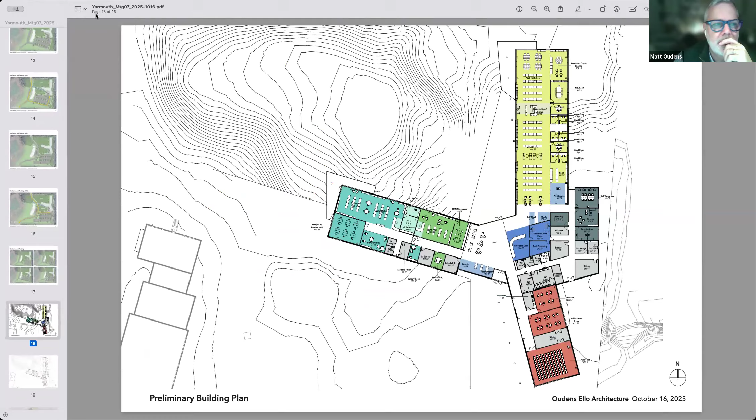Alright, we met at the Board of Selectmen, or the Select Board, we were making a presentation of our progress so far and presented them with the challenges of the MacArthur School, gave them the results of the visit from your engineer and the initial concept design for the site. And then we got our marching orders to pursue this with an aim of meeting the December deadline for submission for the grant, and keeping alive on the side the possibility of refurbishing, renovating, repurposing the MacArthur School. So for this part of our conversation, looks like Matt has definitely moved ahead with the concept design.

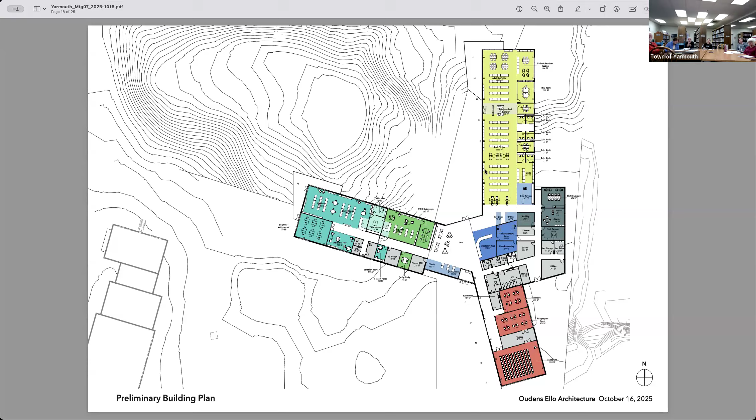So as you can see, this is a more concrete plan. It's now delineated with walls and doors and solid versus glazed partitions, furniture, so you start to get a sense of scale and can understand the layout. In the adult space, for instance, although we have not done a collection count yet, the shelving here is kind of a placeholder graphically until we do a collection analysis. But you can see where we've got book shelving, where we have groups of furniture.

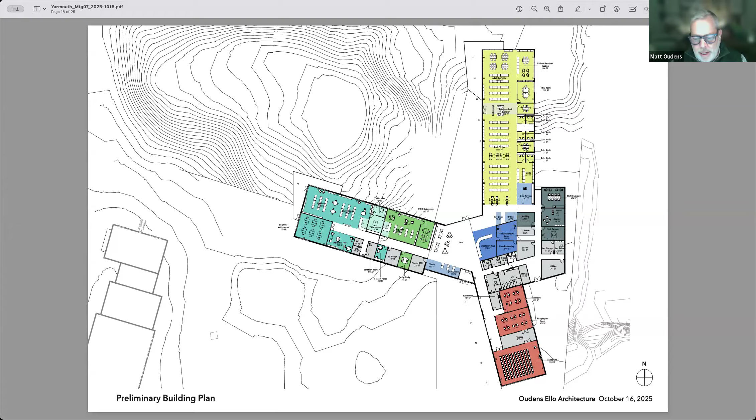These are individual lounge chairs. There's a reference desk in the middle here. Study rooms are located along the right side of the plan. The community room has seats now in at the front of the room, on the right-hand side here. So generally speaking, you can get a sense—I'll turn the color off here to make it a little bit easier to read.

So this is a first pass. There will be many, many iterations and revisions to this, but this was our first attempt to get this down on paper—double-check square footages of things. We've got some work still to do to tighten this up and make sure each room is meeting what the program calls for in terms of square footage, as well as getting adjacencies and access to work properly.

So I'll let Marika and Libby jump in here if there are specific things they want to point out, since they were really the ones developing these plans. Not to put you on the spot, Marika, but if there's anything in particular you've found as you've been laying these out—questions, concerns, or observations you've noted over the last week.

I don't know that there's anything I'd specifically call questions or concerns, but I guess we should point out that the community wing has changed to a certain degree, with the circulation now on the outside wall and the rooms facing the woods to the east side. And we have adjusted the children's and teens wing to show the glass wall that separates teens from the hall.

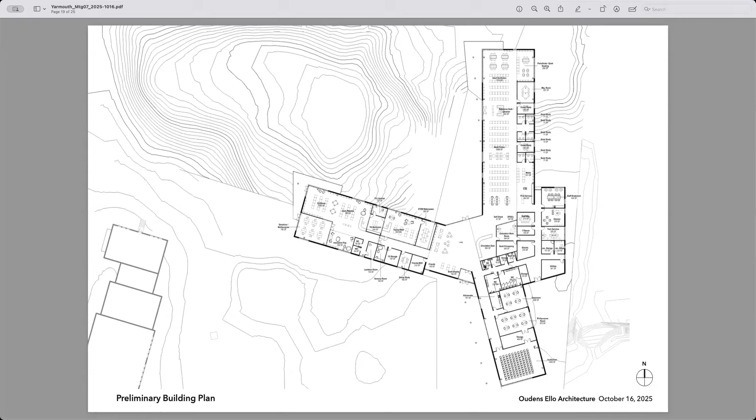This line here represents off hours secure closure. We're thinking that there would be a storage compartment here, and a stainless steel curtain effectively gets drawn across this area with a track at the ceiling. That secures this entire adult wing and the circ desk and staff areas. You would lock this door here, so there'd be no access back into the staff areas.

But obviously we need to maintain access to the bathroom. So we have two multi-stall bathrooms, men's and women's. Those are going to have to be designated single sex, multi-stall bathrooms. But then opposite those, off of that same corridor, we have two single occupancy, gender neutral restrooms as well. That's all part of the off hours experience.

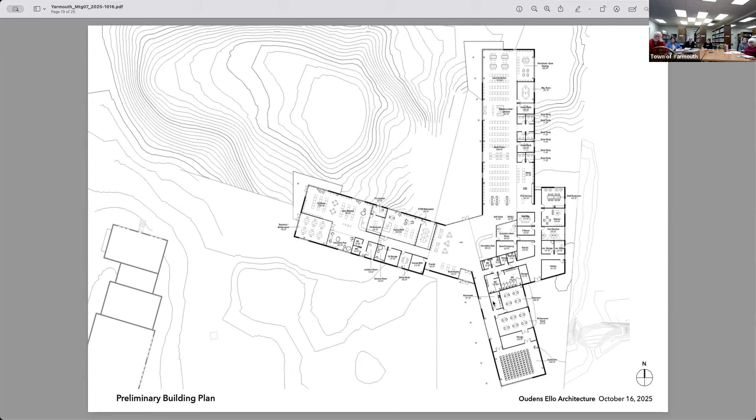The kitchenette here serves both the meeting rooms and activities in the lobby. So even if there's something happening in this meeting room, somebody could potentially get into the kitchen if you're going to have some kind of coffee service. We've also done it in different instances where we have a coffee counter set up that's independent from the kitchen, so the kitchen can be secured and staff only, but there's a public coffee bar or something, if that's something you're interested in doing.

So the kitchen, the bathrooms, storage, which is shared by two of the three meeting rooms, the large one and the classroom, the multi-purpose room, and then the large meeting room - all of that is accessible off hours, as is the lobby. The children's and teen doors would be locked, so basically all the doors in this corridor would be locked. We could actually introduce a door at this end that is open during the day, but you can close it at night to have a single point of security, so you don't have people wandering down a hallway.

So that would mean that the lobby, most of the lobby with access to outdoor space on the north side of the building, this entire community wing, all the public bathrooms would be available off hours. You would use the same door that you would use normally - there isn't a special off hours door.

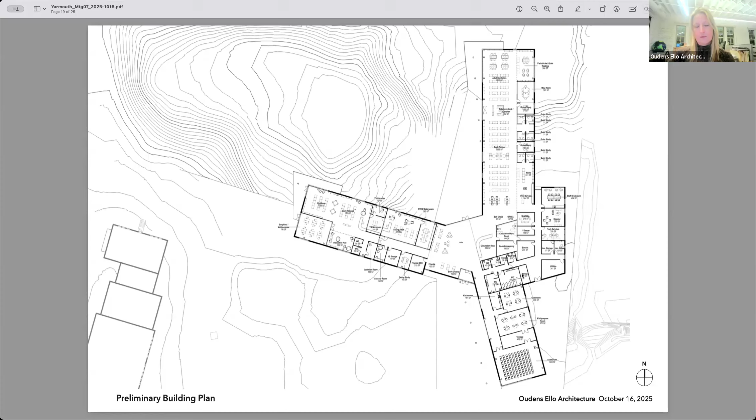Yeah, and that's pretty typical at this stage. When you're first getting things down on paper, they tend to be slightly inflated, and the more iterations we go through, the more we find efficiencies and tighten things up. We might be able to make circulation more efficient in some cases, and get rooms right sized. Right now, my guess is that a number of the rooms are a little bit off - some are probably bigger than they need to be based on what the program calls for. So there will be several rounds of that kind of tightening, along with whatever comments come out of the more specific staff meetings we anticipate having.

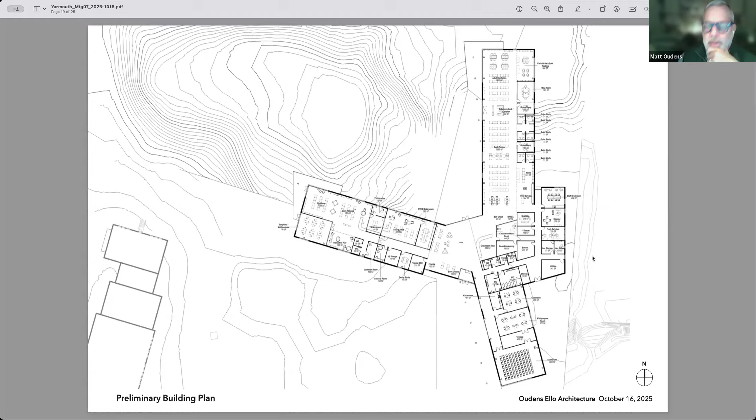I'm going to jump in. Marika, or whoever's controlling the cursor, can you show me where the two circulation areas were? I think I heard there was a circulation area for teens and a different one for children.

Can you see my cursor? I'm circling the teen wing now. This is the staff workroom, between the children's room, which is here, and the teen room, which is here. There's glass on both sides. On the children's room side there's a desk for the children's librarian, and on the teen room side there's a desk. There are doors on both sides of that workroom connecting the desk to the workroom, both from the YA side and the children's side. The main circ desk is here, and the reference desk is here.

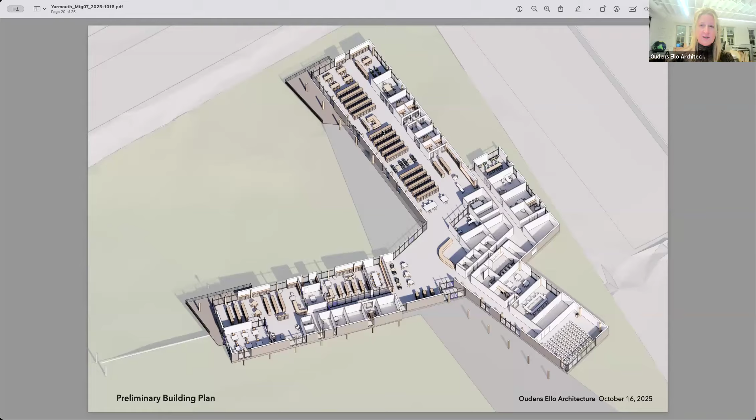Does anybody else have any questions about the plan? Are there only going to be gender neutral bathrooms? Yes, he did describe those.

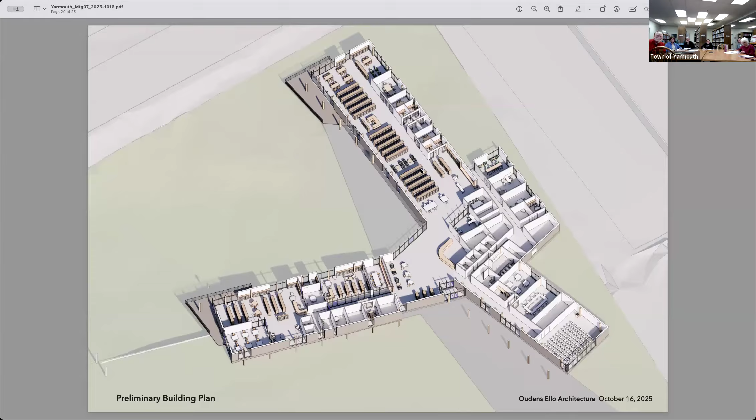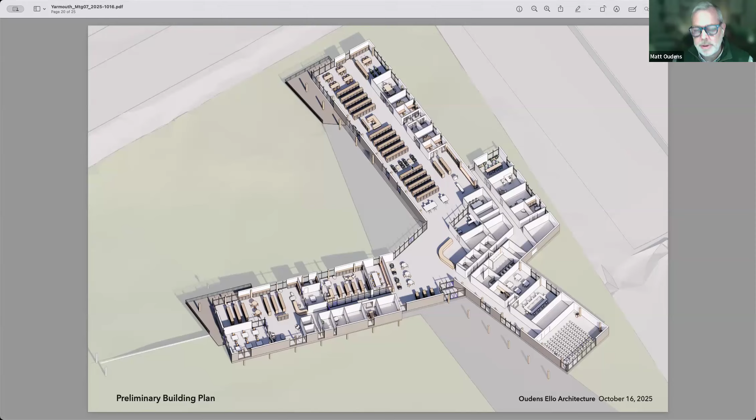Okay Matt, one last thing with this 3D plan up - all of the shelving that's freestanding is meant to be low enough that you can see over the top of it, whereas shelving against walls could be taller. That's our starting point when we do shelving counts and figure out how we shelve the collection. We have actual collection numbers, so we can figure out, for each portion of the collection, how much shelving we need to accommodate it. This is kind of a placeholder now, intuitively striking a balance between collections and furniture, but that will tighten up as we get into that analysis.

All right, so now that Jonathan is here, I'm going to jump back to the beginning and let him take over.

Jonathan, just let me know when you can hear - by the way, can you hear me? I can hear, can you hear me? Okay great, yes, great good. Just let me know when you want me to advance slides, so I'll go ahead and go to the first.

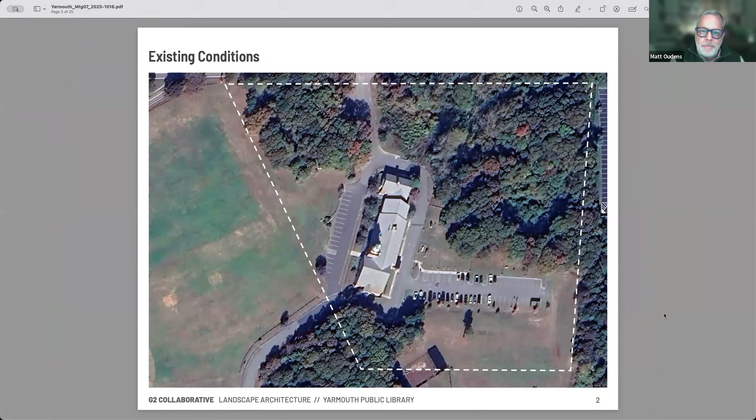Hi everyone. Jonathan, welcome to our Library Building Committee meeting, we're glad to have you here to present your report. Thank you so much, it's nice to see everyone, it's been fun working on this. I might at the beginning be repeating some things that have already been said, so I apologize, but it's just to help set the framework for the work that we did.

So I'll start with the site - we know lots about that. Some of the existing conditions we were looking at, which also helped inform the original site plan shared with you all, are the existing circulation around the school building, the existing parking, as well as the dramatic nature of the topography up at the northeast side of the site, which we're seeing as a fun opportunity.

So Matt, you can move on. This is that site plan that's been shared with you, and this was our starting place as we thought about the site. I'll point out a few things here that you already know: the relocation of the access road, the removal of the ring of circulation, the placement of the building at the northeast corner to take advantage of views of that ravine, and that shared green and plaza that connect the school building with the proposed library and the shared parking.

So we extracted some things from this as a starting place to help us with some design explorations. Next slide. Sorry, next slide, Matt, thanks.

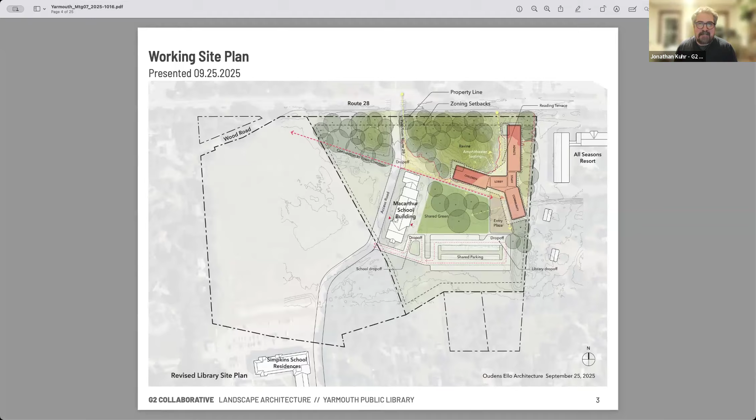So what we pulled from this and wanted to achieve with any further designs was having a sense of arrival and a singular understanding of knowing where you're going, knowing that you're about to approach an important civic building. The connections to the town, pedestrian connections, celebrating the existing landscape and nice topography, having some kind of shared open space for the community at large but also the schools, and a very welcoming entry. So that's what we used to go into our design ideas.

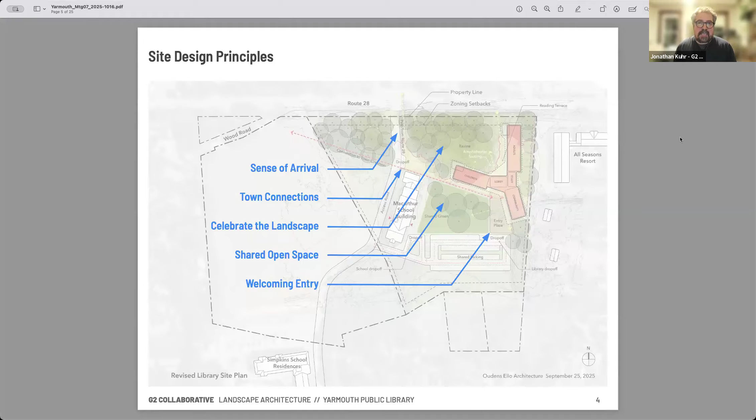I have a few options to share that have different configurations of the parking and landscape types. So this is the first one.

You can see with that bold yellow line, this is our path to the entry of the library. We've lost that circular road around the school, so now we have a single path in. We've pulled that entry road off from the parking a bit, so you're led right up to the front of the library. It also helps when you introduce this new pedestrian connection to the town common.

We have two landscapes that we've created: the ravine landscape on the north, which borrows from the existing ravine, and then a potential informal play space that borrows again from that forest landscape. It brings the forest towards the parking lot, but then we can become a little more informal and fun with that space.

The goal here is also to have drop off near the building with a plaza, and I'll show some examples of the typologies we're seeing here. That'll appear in all of the options, but this could be a larger shared use pedestrian and vehicular circulation space. And then our parking area, which here is showing 100 spaces in that new lot.

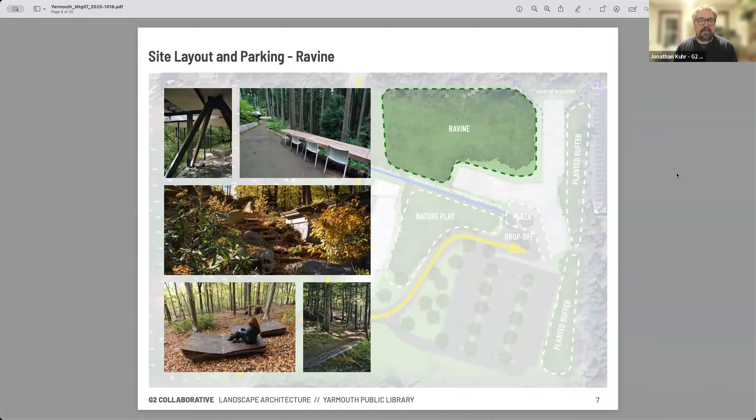I think what we found most compelling - the topography is nice because it gives a little bit of advantage, but it's the wooded quality that matters. So the planting is kind of what we'd refer to, and I think all of our thinking around it would still make sense as far as being a mini woodland, if you will, a forested area - an enchanted forest, there we go. We're not yet sure exactly how we access that space: if it's purely visual, purely from the building, if there's some exterior access, can you walk into it. All of those are big questions, but we're open to anything that folks think would make sense for that space.

The idea of bringing that wooded area to the front in a more open way gave us this idea of an informal nature play kind of space. This isn't play equipment or anything like that - it's usually paths in wooded or even slightly open areas, just kids getting the chance to play with natural materials: fallen logs, boulders, planting, kind of fun forest circuits and that kind of thing.

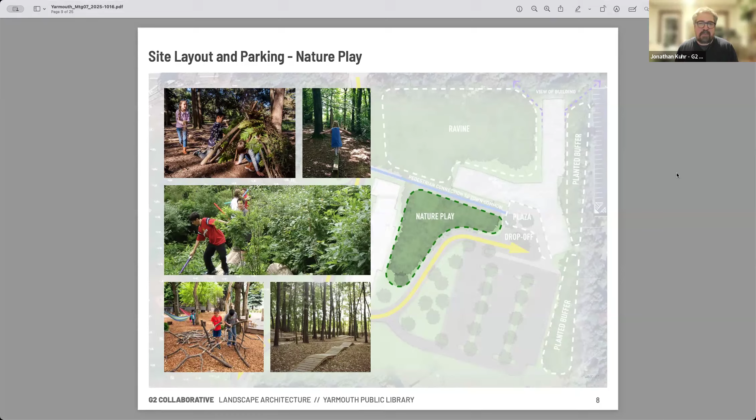The final type I'll share is this idea of a mixed-use plaza, which could expand the scope of the plaza we've drawn here to incorporate the drop-off, depending on how much vehicular circulation happens in that space. If there's a special event, could you close off that drop-off and make the plaza much larger? Here are a few examples, admittedly urban scaled, a bit bigger than what the space would be, but the idea is there are lots of ways to have pedestrian spaces that can be used by vehicles when needed, but otherwise turned into pedestrian friendly, open, programmable spaces.

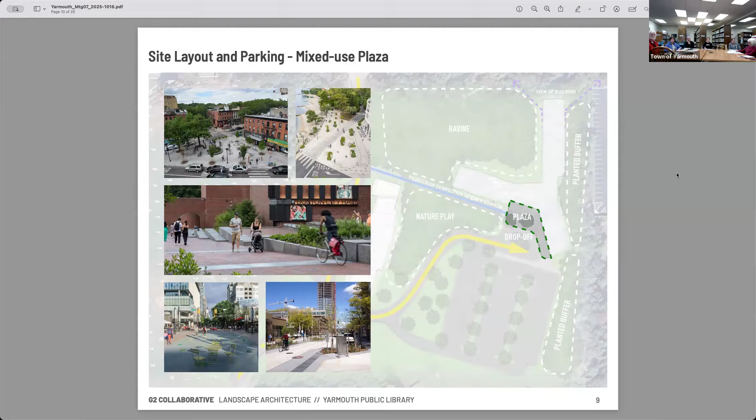Okay. So those types appear in all of the schemes.

This is the next design that we looked at. Here, instead of having a pull-off road, we've taken that space to have dedicated parking for the school, brought the driveway to the library further to the south, and created an axial kind of drive up to the drop-off area.

Oh, sorry, yeah, that's helpful. Thanks, Matt.

That brings you dead center onto the building and the entry plaza. We have the nature play area occupying the space in between, with parking on either side of that central axis to the drop off. So it gets us less parking, unless we were to severely reduce the nature play area.

Okay, next slide. This is option C. Here we've brought the parking closer to the school, so that idea of shared parking might become a little bit easier with the library and the school, since their spaces are closer to that rear entry.

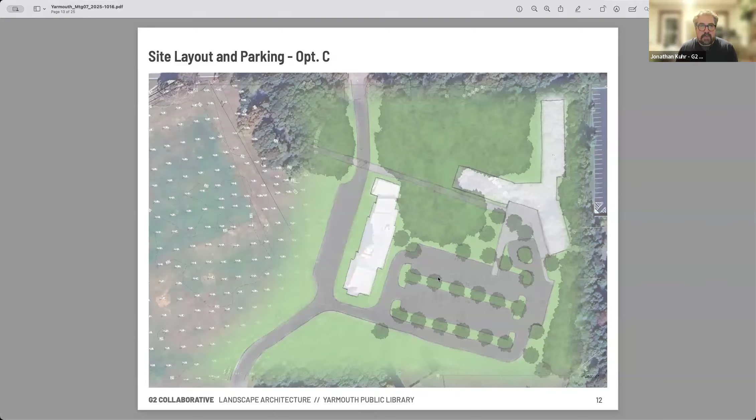We've brought that bold yellow line, which is our new path towards the drop off in front of the library. It now comes from the south and circles the parking. If you know where you're going and want to park, you can pull into the parking lot, but otherwise there's a clear single route to the front drop off.

And here we're showing, again, 110 spaces. Lots of this can go away, there's lots of ways to play with that, but that's kind of our max that we're looking at.

Next slide. This last option deviates from the idea of maintaining the current access road, and creates a new path that follows around the other side of the school to the library. We thought this provided a nice, very clear drive to the front of the library. It requires a bit more work on that road, but it provides a clearer entry arrival experience onto the site, requiring no signage that you're coming to the library—it'll be very obvious as you pass by it.

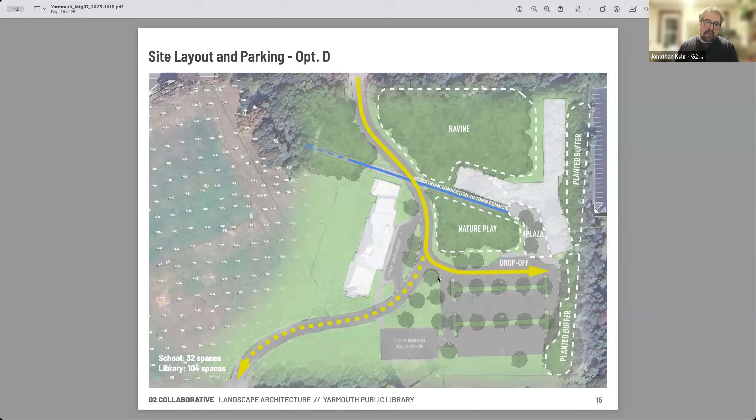What we've done is removed that row of 18 spaces to the west, and introduced the potential for a new, smaller lot immediately adjacent to the building, with the option to also have a dedicated school parking lot just to the south. And then we have our library parking aisles to the east of that.

Okay, I think we have a question here at the table, John. So going back to what Susan was saying, when we had it in the other position, we were worried about the common—should we worry about MacArthur parking? Because anything we do to realign the roadway is only more money, and people are going to think of that as a library thing when it's not. It may make it all better, but if it's a cost, then you're going to ask who's paying for that cost, and then you're getting into sticky wickets. It's more expensive than like 5 more parking spots.

This was also one of the things I was kicking around when Matt first presented his ideas for the traffic flow. After I went home and played with it, I didn't like it as much because it complicates where the student traffic is too. For example, a bus would come in there and then have to veer off, and it just blends all the traffic together. It seems much less safe to me.

So the expectation is they'll do a U-turn and go back out the same way they came in? Is that what you're thinking? The school traffic, yeah, that's what it's looking like to me. That would be kind of cumbersome. Or they have to go into the parking lot, and that's still... well, I guess that's it.

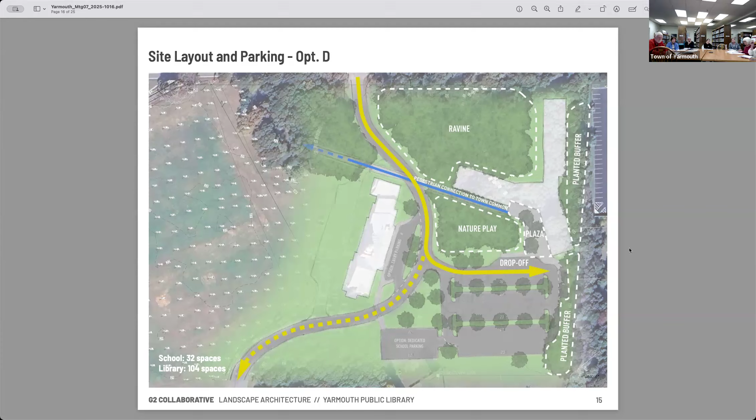Yeah, absolutely. Anybody else? I have a second question still. Oh, okay, sorry. My second question is—Matt, maybe just go to the next slide too, because we can look at all the options at once. Okay, and my next question is, is there a staff spot close to the library to drop off supplies, book delivery, UPS, all those sorts of needs?

Yeah, so this is definitely much higher level, not considering all of the logistics needs. We know those are concerns, but didn't have the chance to know specifically what they were. I think all of those things could be accommodated in any of these schemes once we have a better understanding of what the needs are for staff parking and logistical access to the building.

I think if you look at options A and C, we're getting the drop off closer to the entrance. I would not advocate for an entrance at the southern end of the community wing for a variety of reasons. I think there can be egress there, maybe with a special provision for off-hours use of a door down at the end of the corridor just before the meeting room, but during the day that's going to be problematic in terms of access—you want better control over who's coming in the door.

We have this conversation on almost every project—how far is parking from the front door, how do you get there, people in high heels, people with mobility issues. The reality is that the distance from drop off to the front door is less than the distance you'll go from the lobby to the periodicals room or to the children's story time room.

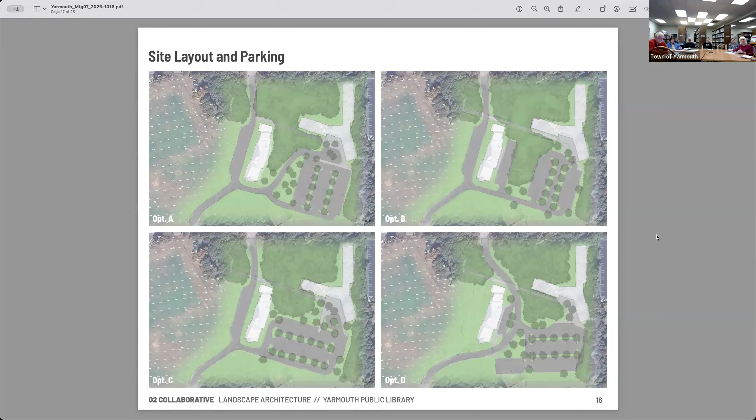David? Okay, he's putting them on the back burner. Jonathan, thank you so much. Nice to meet you. Good to meet you too. Thank you. Jonathan, you're welcome to stay on. We're going to move on to our next topic, or you can hop off, your choice. But thank you for joining us.

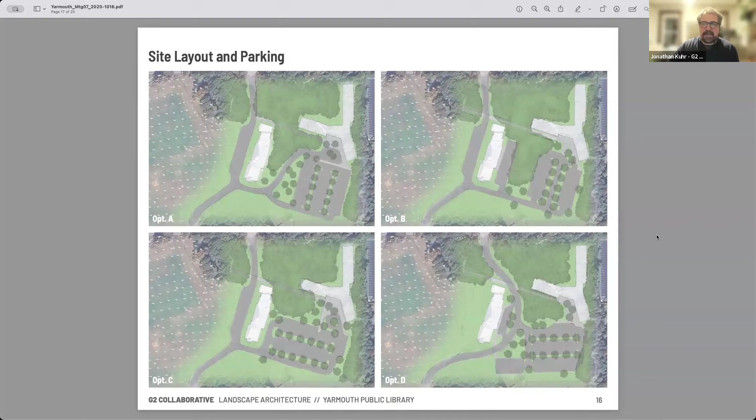Of course, sounds good. All right, moving to our next topic. Skip through the plans here. One of the things we have discovered, what's a project without another curveball?

In the copious documents that Judy uncovered for us about the MacArthur building, one of them was a septic plan, for a system installed in 2003. This is overlaid onto the property. Why they put it here is beyond me, in the woods. Over in this corner are existing cesspools that were probably part of the original building, that have been filled with sand and abandoned.

But there are two sewer lines that run out of the building, one out of the north end, one out of the west side. They come down to septic tanks, which are in the hillside here, and then are pumped.

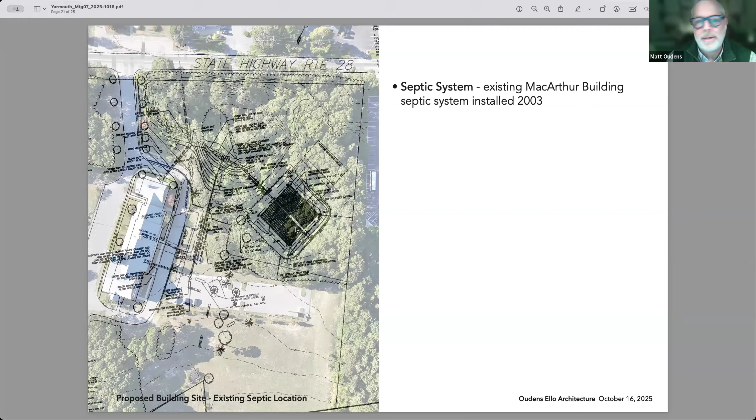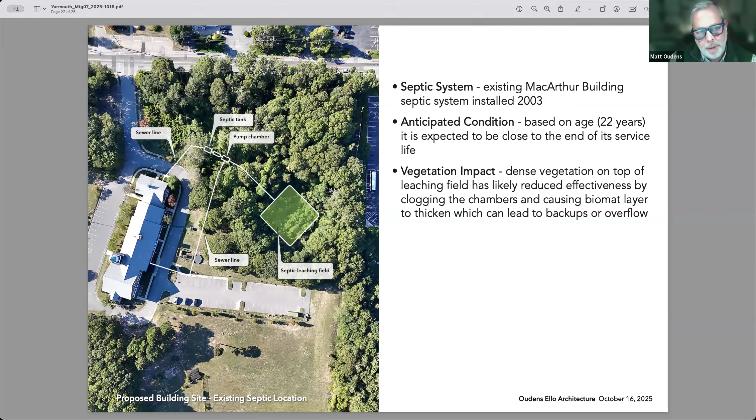I think these flow by gravity down to the septic and pumping chamber, and then they're pumped up to this leaching field. If you look at that overlaid on the aerial, you can see this depression in the tree line. This area is incredibly heavily vegetated, but that's where the leaching field is, according to this drawing. The septic tank and pumping chamber are here. These white lines represent the sewer lines connecting from the building. There's a manhole at this elbow, and then it's pumped from the pumping chamber out to the septic leaching field. This is our building footprint overlaid on that septic plan.

So, a couple of things to point out. It was built in 2003, so it is 22 years old. Based on conversations with our civil engineer, it is expected to be close to the end of its service life.

In addition, there's a tremendous amount of vegetation on top of that leaching field. That is not a good thing — you don't want plants and trees growing on top of your septic field. The roots get down into the chambers and reduce effectiveness by clogging them. It also affects the biomat layer, the bacterial sludge layer below the septic field, where bacteria eat the bad stuff in the sewage so it can be neutralized and absorbed into the soil. When you have a lot of planting on top of a septic field like this, that biomat layer gets thicker and moves closer to the surface, which also reduces effectiveness.

So based on the age and the current conditions — we haven't inspected this, so we don't know for a fact — our estimation is that it's probably pretty close to being at the end of its life. What happens ultimately in a situation like this is you get backups. I don't know if there have been any issues in the school. There is some grade change, so it might take quite a bit for it to back up into the building, because it's going down to the pumping chamber and then back up the pipes to the building. But in any event, that's the existing condition.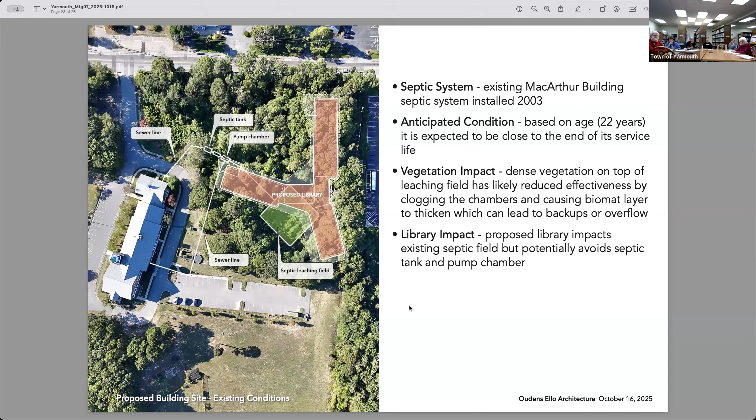We don't know that for sure, Matt. I'm just gonna ask you to wait, John has a question or comment. Yeah, so, I'll go update for everybody.

I'm on the town's Water Resource Advisory Committee, which is responsible for the sewer project. At the last meeting, the contractor of the facility did ask for a 6-month extension, so it's been extended into 2027. Obviously, until that gets built, nothing can go there.

So the million dollar question will be when it will finally be done. I think everybody's anxious, because it's in the middle of '28. It's about how each project gets hooked up to the sewer system and when it's able to go to the treatment plant.

The next meeting's in November, might have more information after that. We're actually taking a trip to the treatment plant at the November meeting. Keep fingers crossed, we'll love to hear any updates you learn for that project. This is not a deal breaker from our perspective, and like I said, what's a project without a couple of curveballs?

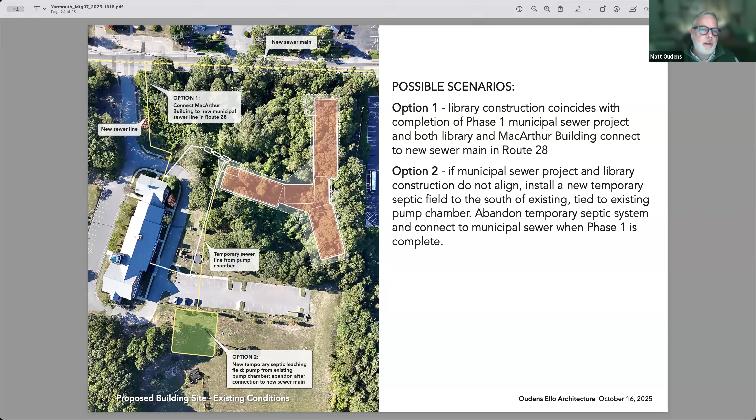So that's all we have. This was a little bit of a bomb to drop on you tonight, but we wanted to make sure you were aware soon after we were, and we wanted to make sure we had enough time to think about it and talk with our civil engineer before presenting it to you. We don't have answers per se, but I think there are probably a couple of solutions here. A lot of it will come down to the timing of the sewer project. It's something we need to capture in the cost estimate and in our documents, so that it's part of an overall project plan and project budget.

Okay, thank you. Never a dull moment. Never a dull moment.